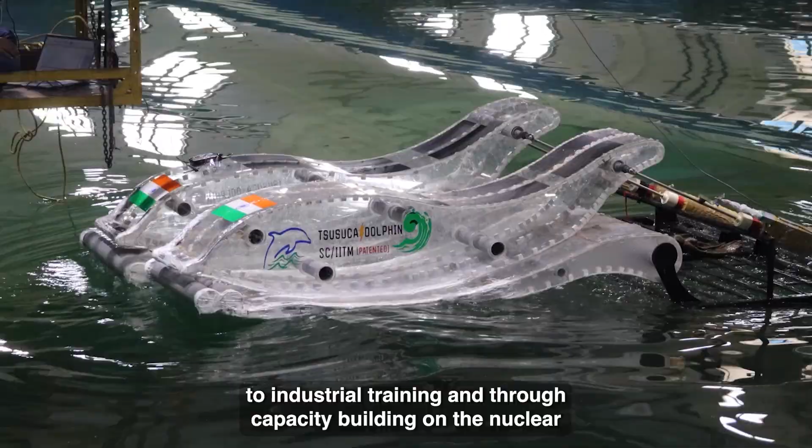This Maritime Engineering program is a very special, multidisciplinary program with input from mechanical, civil, structural, aerospace, naval architecture, chemical engineering, electrical, electronics, and applied mechanics. It is completely dedicated to industrial training and thorough capacity building in the new trade of the maritime sector. It's a booming economy offering many job opportunities and research frontiers as India grows. The Blue Corridor initiative planned by the Government of India is one important mission requiring maritime engineering growth, and this program caters to the expected capacity building for it.

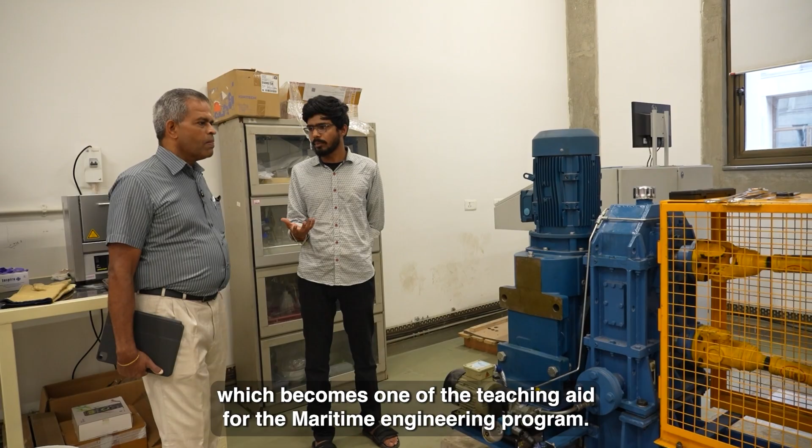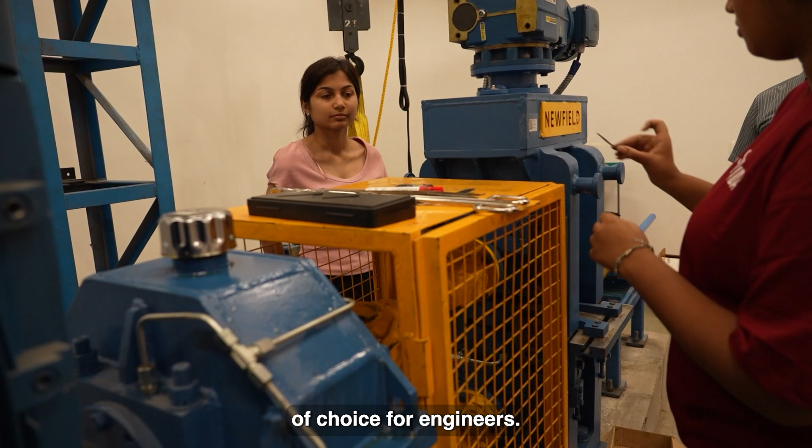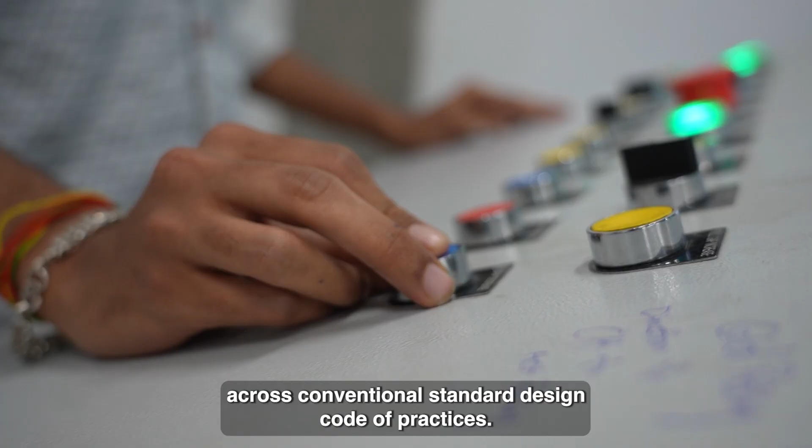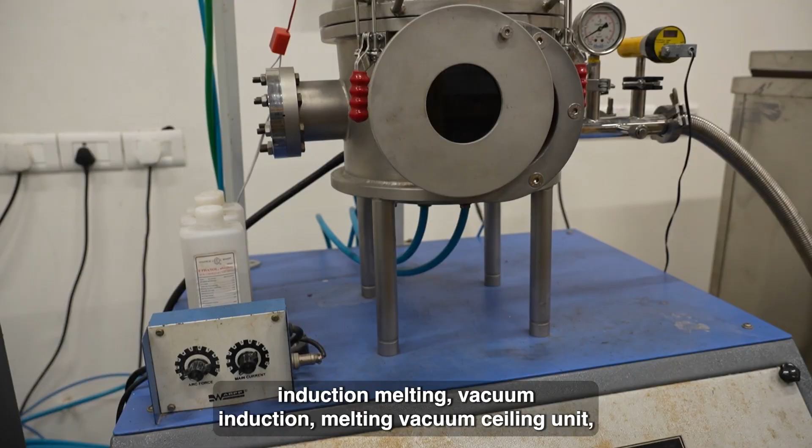This is part of the material science engineering laboratory, one of the teaching aids for the maritime engineering program. When we talk about materials innovation in the maritime industry, concrete and steel have been conventional choices for engineers, but we now have titanium vessels and high-speed craft boats made of fiberglass. These are advanced materials that don't fit conventional standard design codes of practice. We conduct box furnace tests, tube furnace tests, vacuum arc melting, induction melting, vacuum induction melting, and vacuum sealing in this laboratory, which is a small segment of the material science laboratory.

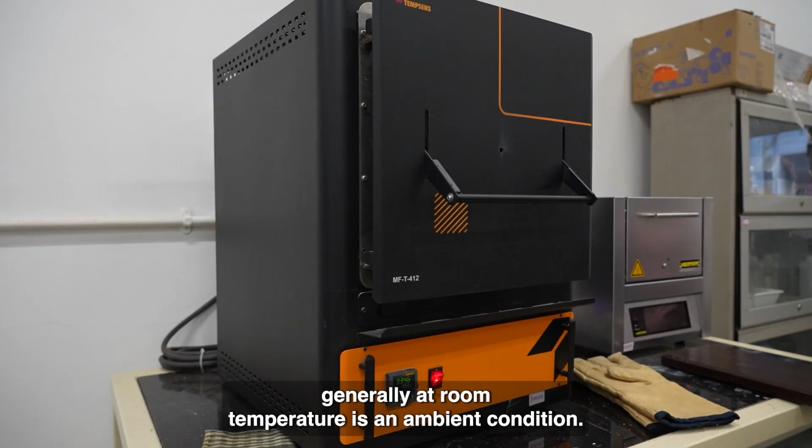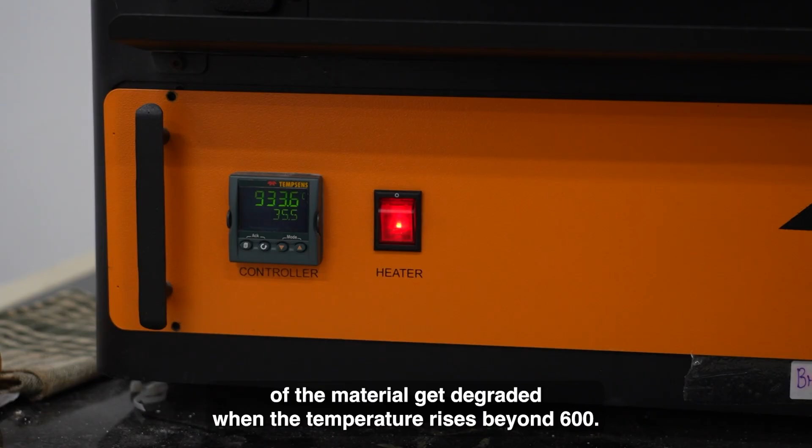A typical furnace here can test specimens at operating temperatures as high as 1200 degrees Celsius. Generally at room temperature and ambient conditions, mechanical properties don't change much, but as you'll see in the course lectures, the strength of materials degrades when temperature rises beyond 600 degrees. Therefore, for fire resistant design, you must choose an alloying element such that the strength doesn't degrade beyond 600 degrees Celsius.

Welcome to the ambience of the IIT Madras lecture theatre, one of the interesting classrooms where maritime engineering classes will be conducted. We have state-of-the-art projection facilities and good audio-visual recording systems. Once the lecture is over, the system here can generate PDF files of the lecture directly and email them to your email ID. It's a state-of-the-art facility where lectures are recorded for lifetime and shared with students immediately. This is the IIT Madras library.

The library has collections of all books referred to as standard textbooks and references for the course and program. It also has many online editions of design codes of practice, reference materials, and e-collections of various video lectures from international courses and programs related to maritime engineering.

We will be taking you around to the advanced material manufacturing units, so you will have state-of-the-art facilities available at IIT Madras. Welcome to the program to join MTech and PhD at IIT Madras Maritime Engineering. Please try to enjoy and take advantage of this to the maximum. Welcome to the program and welcome to IIT Madras.

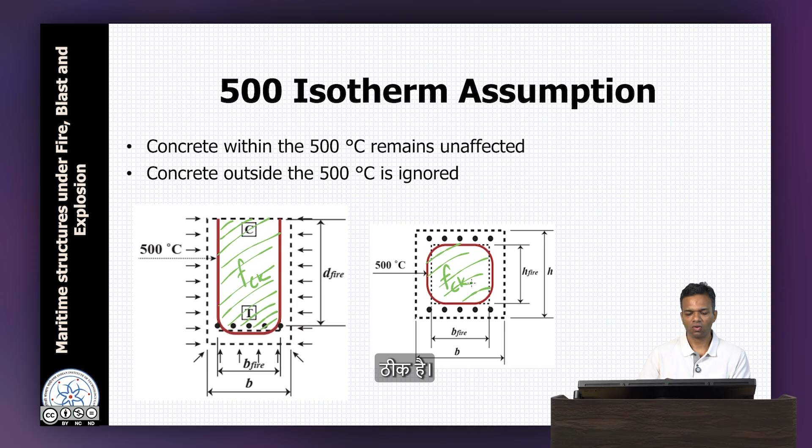Just to quickly review, the 500 isotherm assumption simply states that concrete within the 500 degree isotherm remains unaffected, meaning it has full strength. If this red line shows the 500 isotherm, the concrete inside has full strength FCK - this is the case for a beam, and this case for a column with all four sides exposed. Concrete outside of this has zero strength, so we need not consider it. For the rebars, we compute the temperature and consider the strength reduction factor appropriately, taking that into design calculations. This is the basis of the 500 isotherm method.

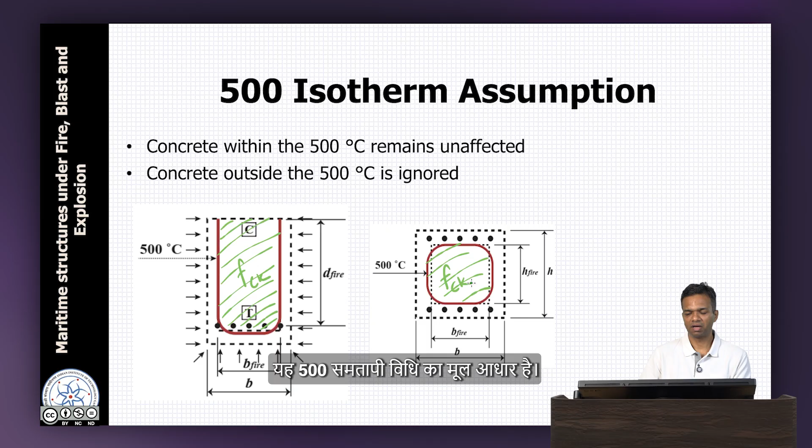We also saw that slabs are generally exposed on one side, while beams have 3-sided exposure, and columns have 3-sided or 4-sided exposure, though columns can also be 3-side, one-side, or 2-side exposed depending on the condition. Now for slabs, the 500 isotherm will be a straight line parallel to its surface.

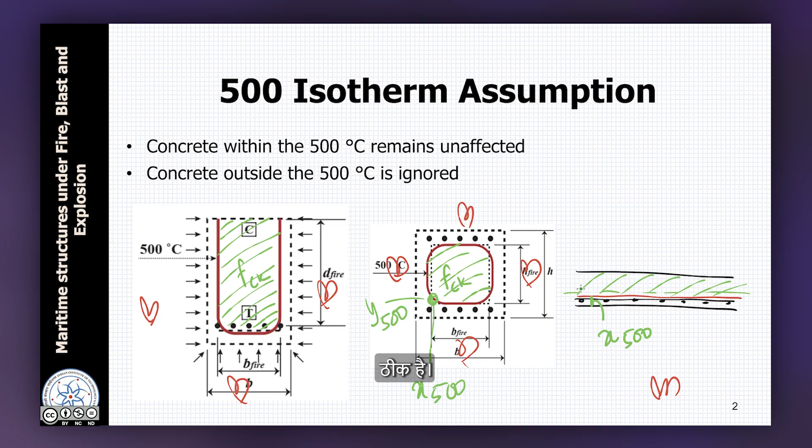This is what x500 will be if you are using x coordinate in that direction, where we were defining x500 and y500. We already defined these things and saw how to calculate this. In case of slab, much of the concrete under compression will remain functioning because the neutral axis lies somewhere here, and concrete below the neutral axis in the tension zone is anyway not considered for design. So this is the basic overview of the 500 isotherm method.

Now the next kind of structural member in RCC will be slabs. So we look at design of slabs. It is customary to consider design of slabs as similar to design of beams, except that for B we give B equal to 1. However, one major difference happens in the thermal analysis.

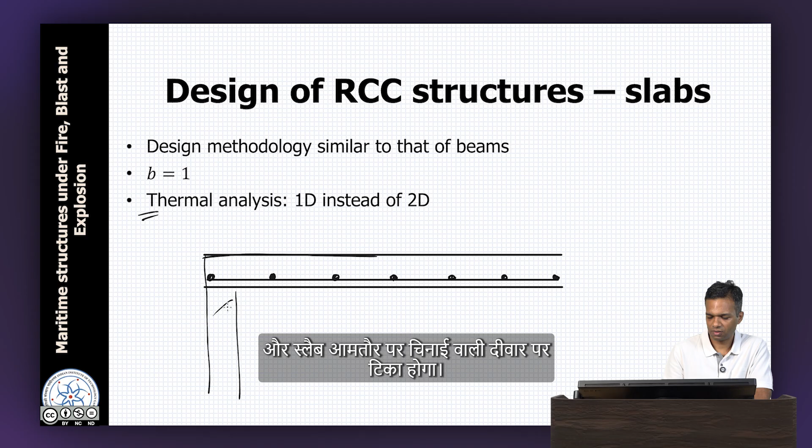So let us say we have this slab, which has a reinforcement going there, like this, and the slab will generally be supported on maybe a masonry wall, or it may be supported on a column. The fire scenario will be such that if there is a room at the bottom where the slab is covering it, the fire happens inside the room. So only the bottom surface receives this heat, and hence this is a 1D heat transfer problem instead of 2D.

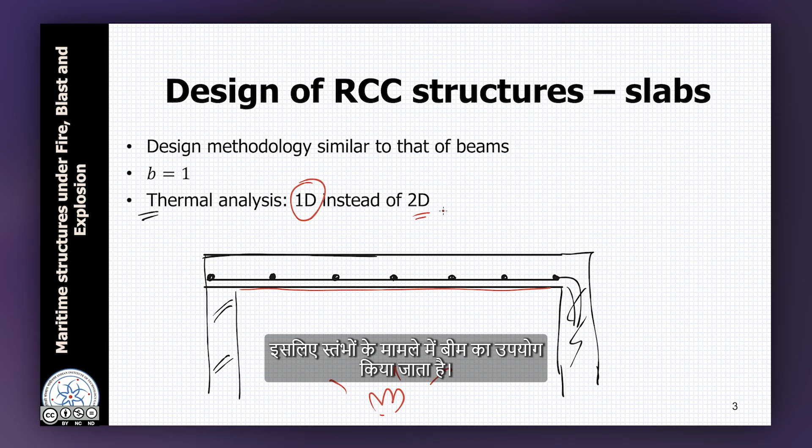In case of columns or beams, we can have one-sided exposure, two-sided exposure, three-sided exposure, or four-sided exposure. These are the possibilities. Whereas in case of a slab, we generally have only one-sided exposure. Because the exposure is one-sided, we can do thermal analysis also in one dimension instead of in two dimensions, right?

And we have seen this when we were doing the Wickstrom method. We just oriented this in a vertical manner, which means for the purpose of orientation, we said it is like this, where this is the x axis, exposure is on this side, and then temperature distribution on this x axis will be like this for an insulating material, where Ts is the surface temperature which links with the fire temperature through convection and radiation. And then if you recall, we also defined this delta, the penetration depth. So we can talk about delta500, which is the depth at which temperature is 500. So thermal analysis can be done in one dimension, which is a great simplification.

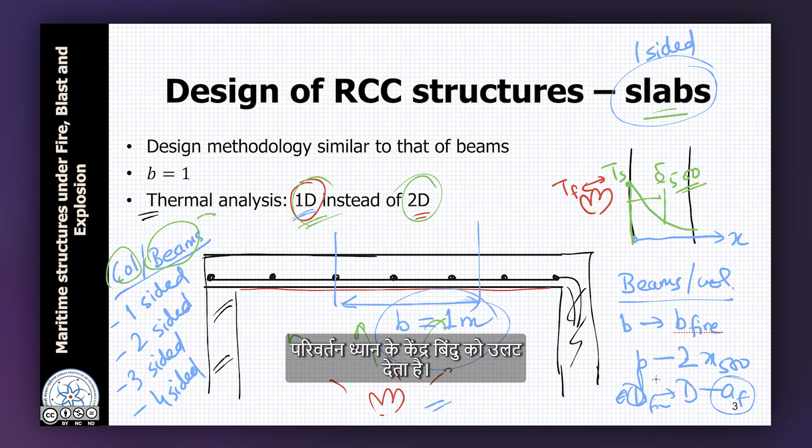So for beams or columns, this B became B fire, which was B minus 2 times x500. This capital D became small d fire, where it was capital D minus A fire. A fire was the location of the centroid as temperature changes, centroid of the tension rebars. However, in this case, since it is one-sided exposure, there is no reason why temperature here and here will increase independently of here. So the B remains the same. So there is no B fire as far as slabs are concerned.

Okay, so now let us look at this example. There is a simply supported slab of this span, thickness 200 mm, so this is capital D. M30 grade concrete, FCK is M30, 16 mm diameter, Fe415 bars, the spacing is given, clear cover is 15 millimeters, and the bending moment demand per meter is 70 kilonewton meter. So now we have to determine its fire rating or fire resistance subjected to a standard fire from the bottom.

Okay, so let's now begin to consider this directly in the code. In the given data, we have B and D. So B we have taken as 1 meter, and capital D is 200 millimeter.

FCK M30, so 30 megapascals, 415 steel, and this is the spacing. The spacing in this case will be required to calculate area of steel. In case of beams, we get area of steel simply by saying area of one bar multiplied by all the bars which are there.

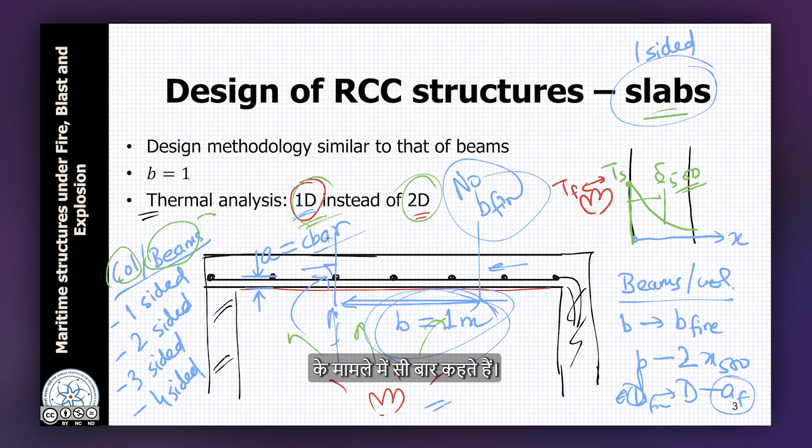This is the diameter of the bar, 16 millimeters. This is the clear cover, which is also given. So C bar, this is like A, the centroid of the rebars, which we are calling C bar in case of slabs. C bar is clear cover plus diameter of the bar by 2, the centroid of the bar from the bottom.

AS, which is area of steel, is width, which is 1 meter, divided by spacing, multiplied by area of the bar. This is the total area of steel AS. Then M demand is the total moment demand.

Since we will be doing a one-dimensional heat transfer problem, we are doing thermal analysis of the 1 meter strip. Bottom surface is at x equal to 0. If we have a slab located like this, the coordinate axis is oriented this way. So this is x, and this point, bottommost point, is x equal to 0.

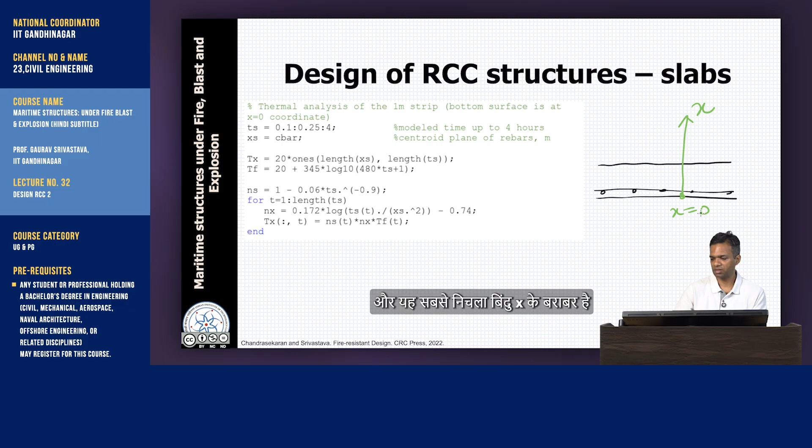The centroid plane of the bars is at C bar, which is this. Tf is fire temperature, standard ISO 834. Then we use Wickstrom method, so Ns, Nx, and we calculate Tx, which is temperature of each such point as a function of time. Tx is a matrix where each column represents one time step and each row represents one coordinate in x.

Once we have done the thermal calculations, we move on to structural calculations. For Tx, which is for the centroid location, we get the strength reduction factor for the rebars. Now force taken by the rebar, which is force in tension, is Ksy, which is this factor, multiplied by Fsd, cold strength, multiplied by As. Then force taken by concrete.

Lambda is 0.8, eta is 1 because Fck is less than 50. So again using the same rectangular stress block, we are calculating depth of neutral axis. Once we have depth of neutral axis, we are calculating moment capacity, like this.

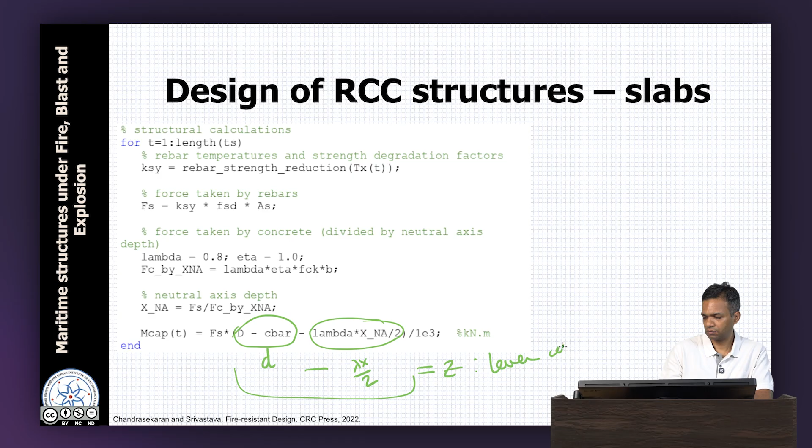Let us look at one more example. So again, a simply supported slab, 4-meter span. Span is lesser, depth is same, 200 millimeters, M25 grade concrete, 18 mm diameter, 415 bars, spacing is 125 mm, and clear cover is also same.

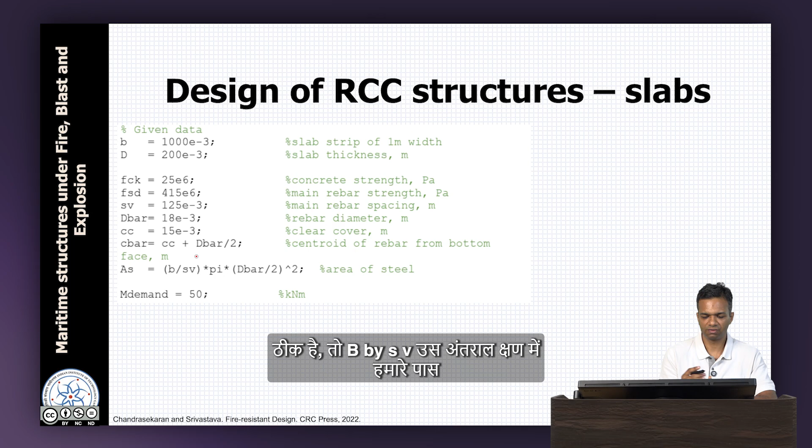We go right into the code. We have geometrical parameters B and D, FCK, Fy, spacing, diameter of the bar, clear cover. This C bar is like the small a earlier, which is clear cover plus diameter of the bar divided by 2. Area of steel will be B by SV times area of 1 bar, so B by SV is how many bars we have in that spacing. Moment demand is 50 kilonewton meter.

Then we go on to thermal analysis. For thermal analysis, we are calculating it up to 4 hours. XS is the coordinate of the centroid plane of the rebars, X coordinate. TF is temperature of the fire, again ISO standard 834 curve. And this is the for loop for temperature calculation using Wickstrom's method.

We've been using the same method throughout for RCC. So we have now these structural temperatures, right? So this Tx has been calculated.

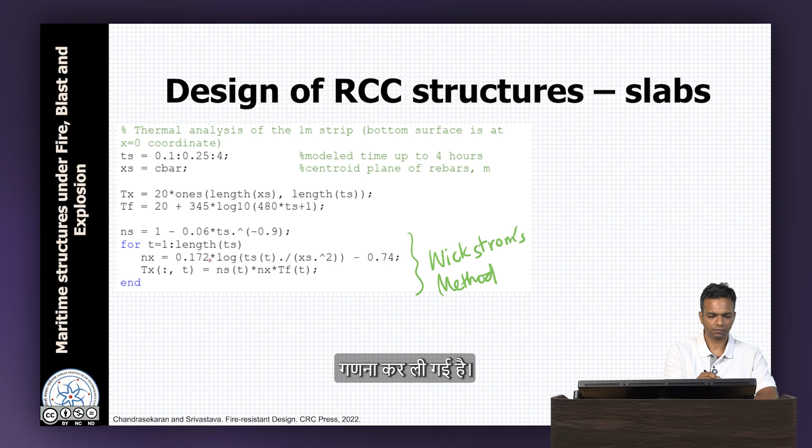We have Tx. Now we can take the rebar temperatures out. After we have taken the rebar temperatures, we calculate the strength reduction factor for rebars. Then we calculate forces taken by the rebars.

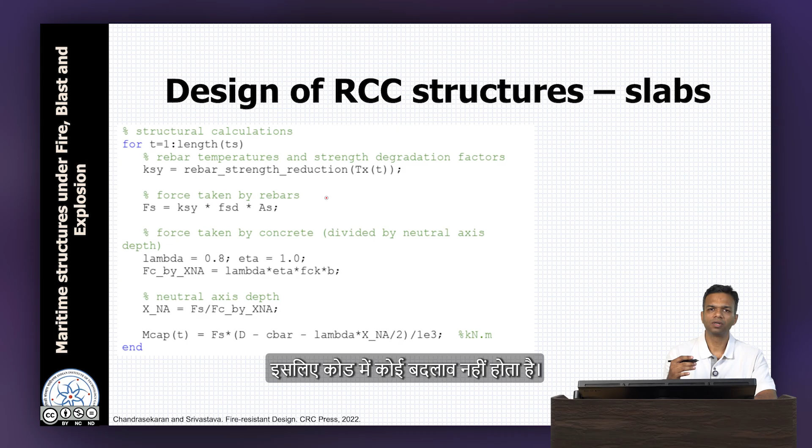Similar type of calculations, so the code does not change. Only thing that changes is the initial inputs of the geometry, of the rebar, strength, and other things.

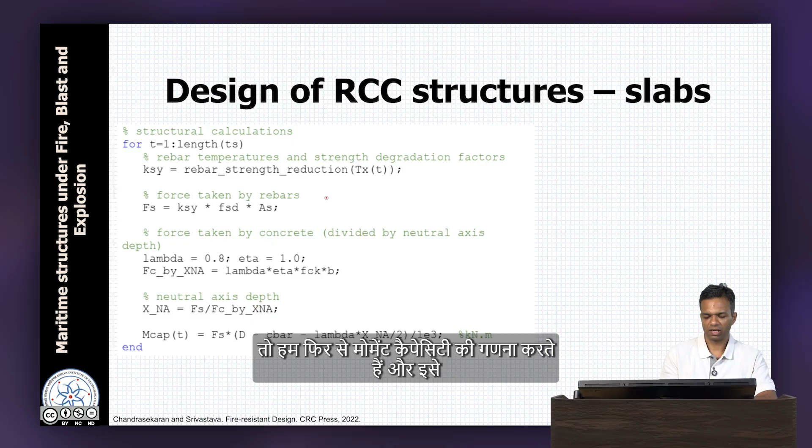So again we calculate moment capacity and we can plot it with respect to temperature or time. Temperature and time are correlated through the ISO 834 curve, and the fire rating we get here is a little over 1.5 hours.

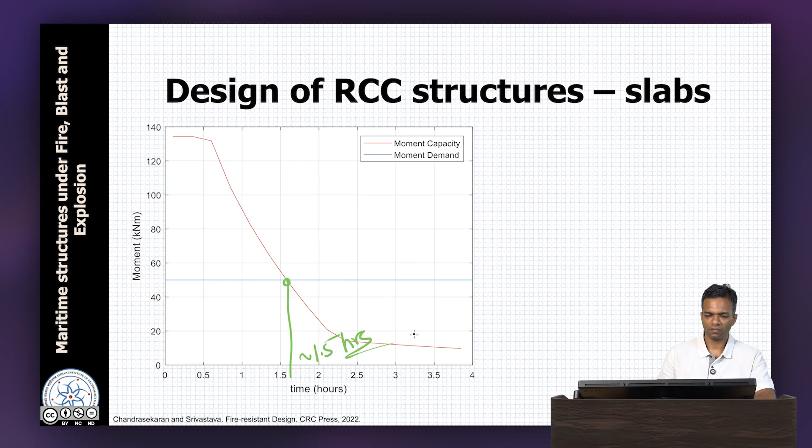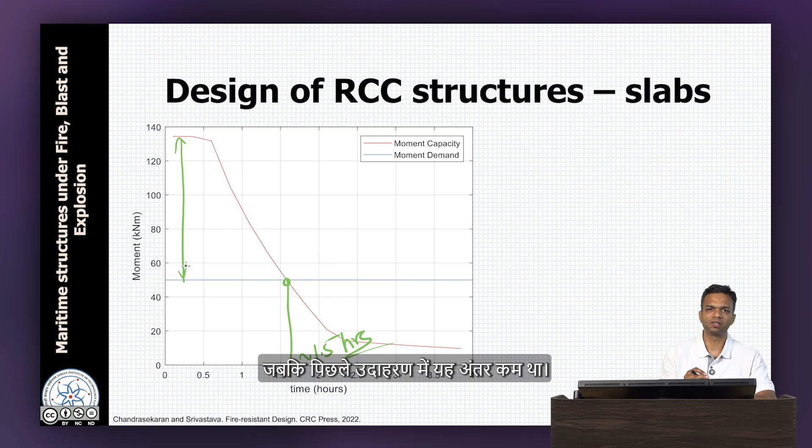One thing we will notice here is in the cold condition there is a larger difference between the demand and the capacity, whereas in the previous example this difference was small.

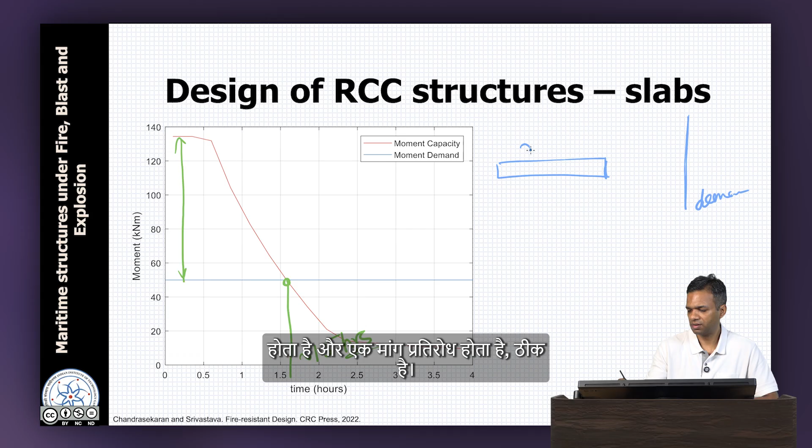This is one of the things which is very common, and it is obvious also that if you have more spare capacity - you may recall in one of the lectures we were saying that there is a design effect and there is a demand resistance - during fire what happens is that this margin of safety reduces.

That is what we were saying. So if initially we have a greater margin of safety, it will take longer for this thing to fail, and that is what is visible here, that we have a greater margin of safety here, and the fire rating is greater.

This is quite common, and several codes understand and accommodate the fact that if the loading ratio - so this is defined as the loading ratio in steel, IS 800 also does that - the loading ratio was defined as

the demand divided by the capacity. So if the loading ratio is small, the fire resistance rating is expected to be large.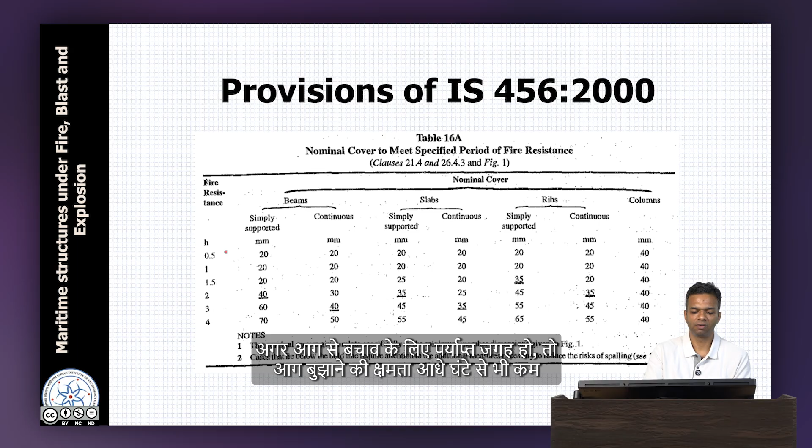or it is also possible to conclude that if 20 mm cover is required for a half hour, 30-minute fire rating, then for a 15 mm cover the fire rating will be less than half an hour. But we know now that this is a conclusion which is incorrect.

So the clear cover is 15 mm. This is the first beam where we had the fire rating of 1 hour, whereas obviously from here you cannot conclude that.

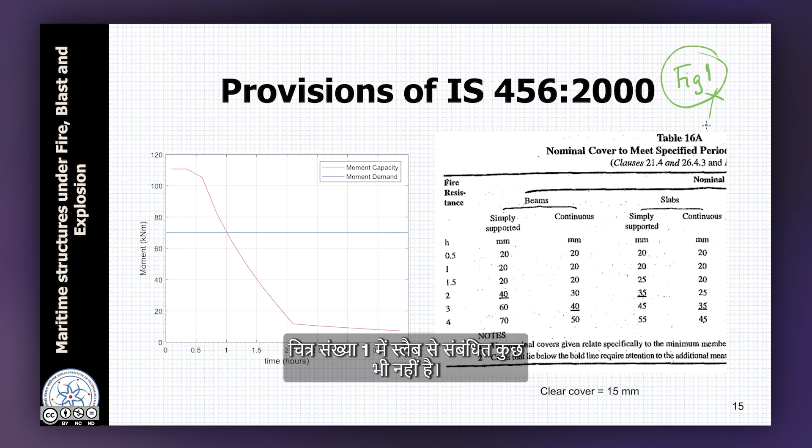Now here we are referencing only table 16A. We are not referencing figure 1 of IS 456 because figure 1 does not have anything related to slabs. So this is the first example.

Second example also, clear cover was 15 but fire rating was higher. So simply the effect of this loading ratio cannot be taken in tables of this kind, and this is where detailed calculations are necessary for us to be able to actually calculate the requirements.

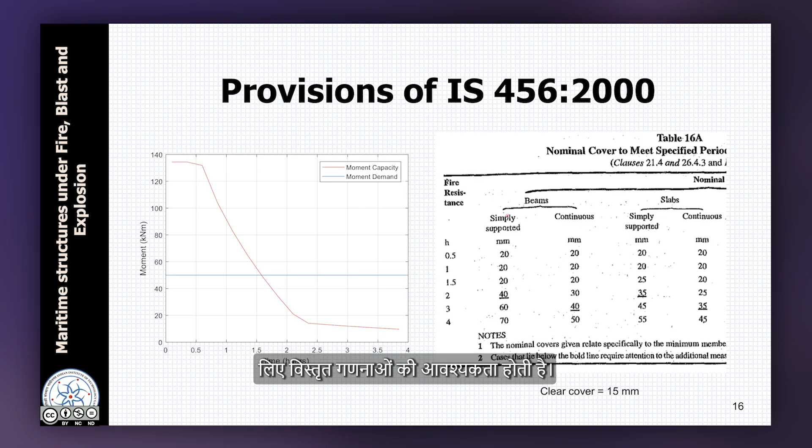Now let us move on to study design of columns, RCC columns.

Now this particular thing shows again the 500 isotherm. We will use the same method. This fully closed 500 isotherm is a case when a four-sided exposure has happened, but we know that if there are other sides of exposure, then this 500 isotherm will be accordingly adjusted.

Right. So we know that if the column is taking axial load, there are two parts: one is the compression taken by concrete, one is the compression taken by steel.

So for concrete we will have the area of concrete which is B fire times D fire, or in this case H fire as in the diagram. So that is the effective area - this is the area of concrete that is effective at any temperature, which is inside the 500 isotherm, times FCK, which is the strength of concrete in compression.

And then there will be NS fire, which is the load taken by rebars. So for rebars, we will take each rebar and factor in the strength reduction factor, and the total will be a combination.

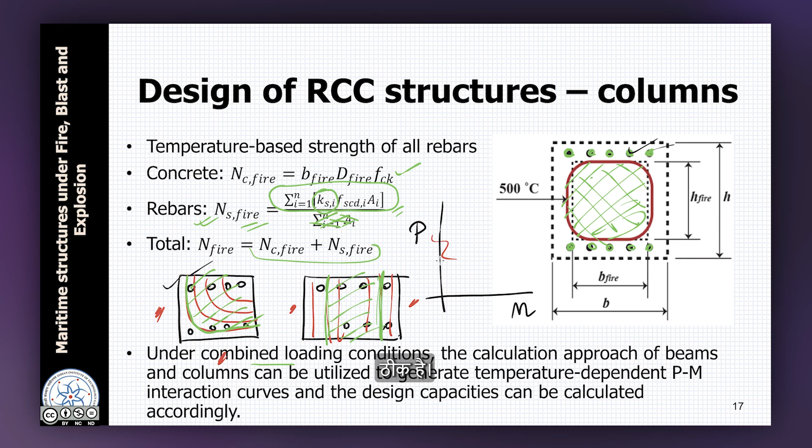So this is the case when we have pure compression. However, there can be combined loading conditions where there will be a moment as well as a load. In such a case, we will have to do section analysis in line with these assumptions of 500 isotherm, and we will have to develop this PM interaction. What one can expect is that if this is the PM interaction in cold conditions, under fire conditions this interaction diagram will shrink. So as temperature increases, the diagram shrinks. However, the calculation approach will be the same - there is no change.

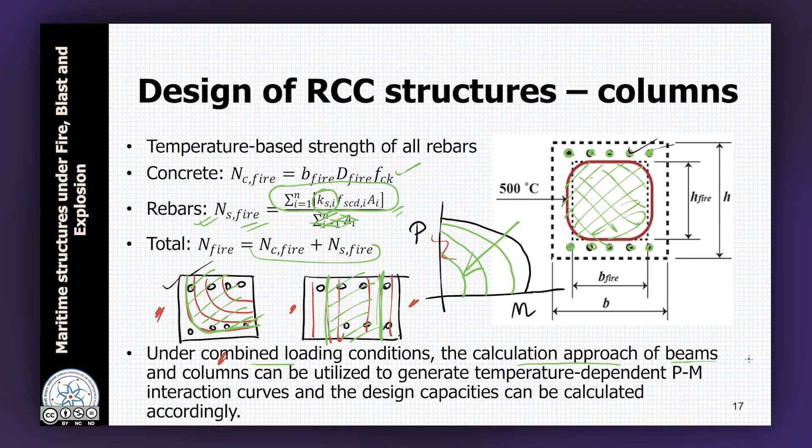Let us look at an example. So we have a short reinforced concrete column of dimensions 500 by 400. Grade of concrete used is M50. Fe 500 grade steel is used. Diameter is 20 mm for all the bars, and load demand is 8000 kilonewton.

So this is what we are showing here. I think there is one change in the text here - these intermediate bars, internal bars, these are 20 mm, but the external bars are 25 mm. That is a difference.

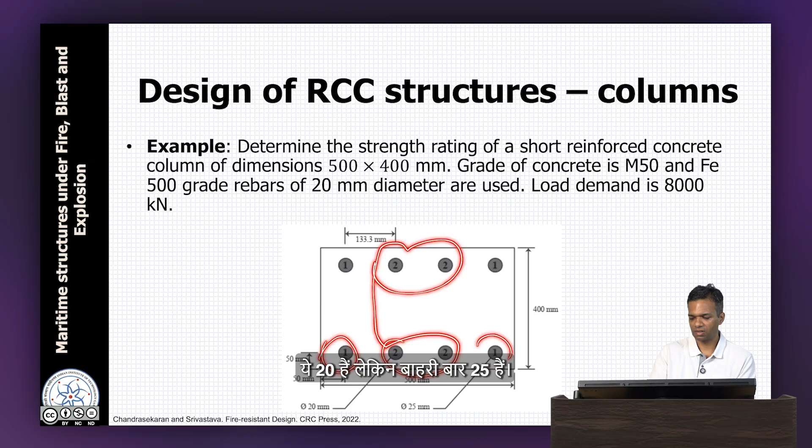Now we follow the coding approach that we have been doing. Initially we have B and D - here we are calling B as 500 and D as 400. FCK is 50 MPa. We are using Fe 500 steel, so FSD is that, for both. The demand load is 8000 kilonewtons. So just like we did for beams, we do a rebar data structure for all the rebars.

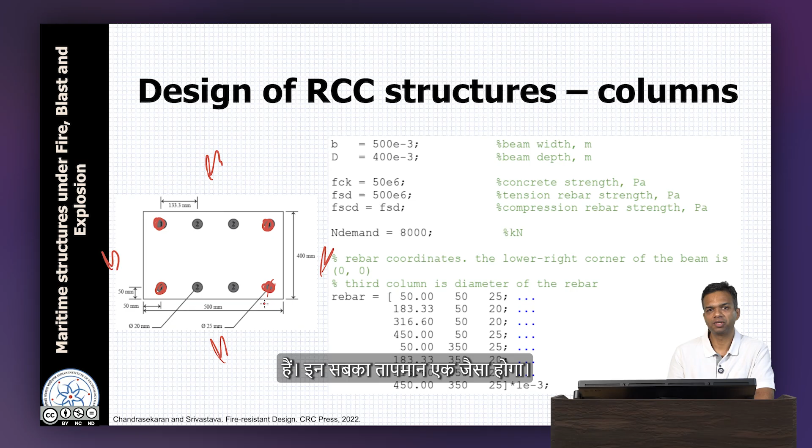Now here this is a four-sided exposure, so we have fire on all four sides. So from a temperature contour point, they will be circular in nature. So we will see that these four bars will have the same temperature, and hence they are labeled all of them as 1, whereas these also will have same temperature and they are labeled as 2. So this first row corresponds to the first rebar here.

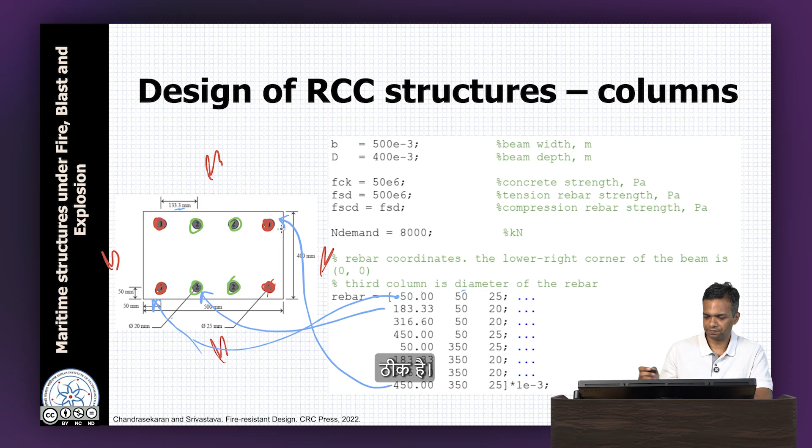So the x and y coordinate is 50-50, diameter is 25. Then this is second, where x coordinate is 183 - that is 133 plus 50, y coordinate remains 50, diameter is 20, so these two bars are of 20 mm. So like this, and similarly this last one is here. So this is how we have defined the rebar coordinates and their diameter.

Now for thermal analysis, we will have to again go back to two-dimensional analysis. For slabs we were able to use one-dimensional analysis. So we are doing modeling up to 4 hours. X and Y coordinates are like this. Now here, since it is a 4-hour exposure

on all 4 sides, we can see that the axis of symmetry lies on both sides, which means we can take only 1/4 and we model only this because we have axis of symmetry. So this axis of symmetry is happening, 2 axes of symmetry, because we have 4-sided exposure, and also the geometry and the rebars are equally distributed about these 2 axes. So for x's and y's, we are only modeling up to b by 2 and d by 2.

Then this ND grid is same as that we were doing earlier, enabling us to calculate contour of temperatures in 2D. TF, same as earlier, fire temperature corresponding to ISO 834 curve. Now this loop calculates temperature. The third index T denotes time, which means we are storing one matrix for each time, and each matrix corresponds to the XY coordinate temperature within this symmetry section. Now using this one can plot, so we will get the temperature contours.

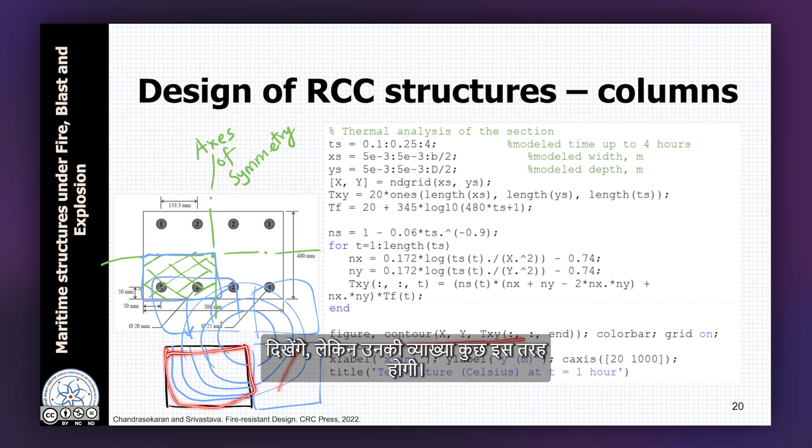Once temperature calculations are done, we move on to structural calculations. First we find out X500 and Y500. In one of the lectures we saw the function locate X500 and how it works. This XX500 comes out of the contour function, which is a 2 by n array, where after the first column, each column gives us the X and Y coordinate of every point located on the 500 isotherm.

Then we calculate B fire and D fire. In this case we require both because the overall cross section is reducing. So B fire is B minus 2 times X500, and D fire is D minus 2 times Y500.

This is B fire, which is B minus 2 times X500, and this is D fire, which is capital D minus 2 times Y500, where Y500 is this distance, and X500 is this distance.

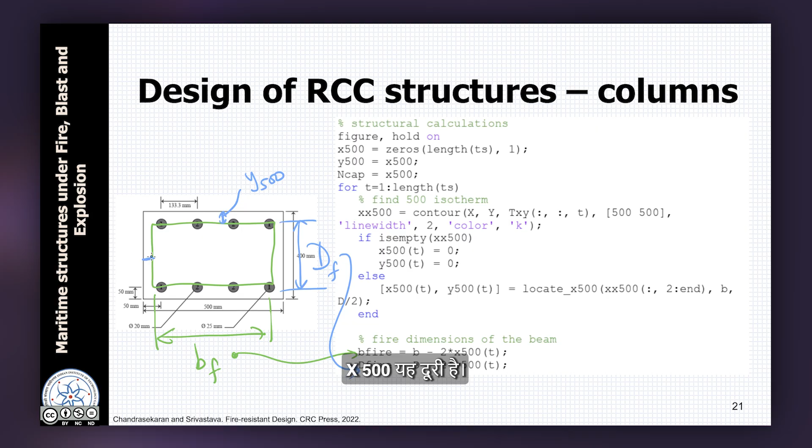So now that we have completed the thermal calculations and found the location of X500 and Y500, we have calculated B fire and D fire. Now we can move on to structural calculations.

Before we can do structural calculations, we also require rebar temperatures. This we obtain in a manner similar to what we did for beams. So for rebar, each column of this data structure: the first two columns give us the x and y coordinates, the third column gives us the diameter. So we calculate x, y.

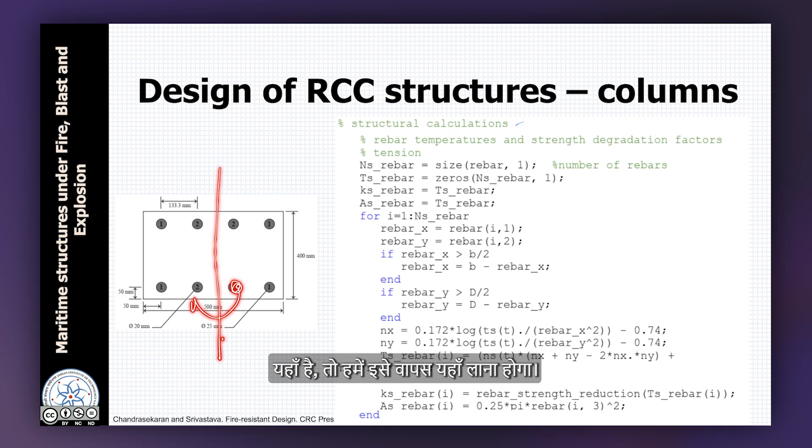Now if the x coordinate is more than b by 2, which means if the x coordinate is here, we have to bring it back to here. This is because we have modeled symmetry about this axis. So if it is more than b by 2, we say it is b minus rebar x, so this bar and this bar will have the same temperature.

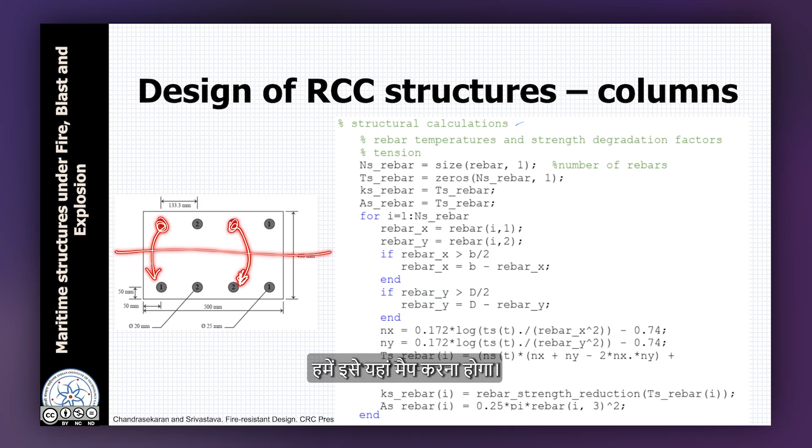In this case, because it is a four-sided exposure, we have also used symmetry about this line. So if the y coordinate is greater than d by 2, which means if the y coordinate is here, we need to map it to this particular point. If the y coordinate is here, we need to map it here. That is what is being done in these two lines.

So once we finish this, we have the x and y coordinates of the rebar. Then we calculate the temperature at that xy coordinate using Wickstrom's method. So this Ts rebar, this is Ti, the temperature of each rebar we get from here, and this is Ki, the reduction factor for each rebar. This last one is Ai, the area of each rebar.

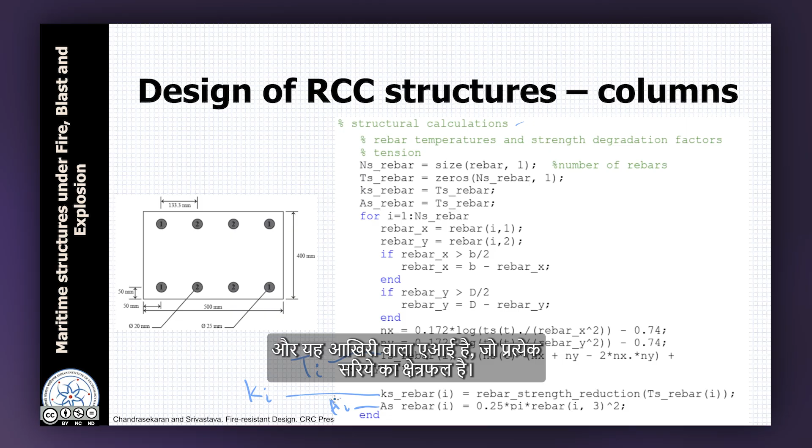We have calculated all of that, then we can move on with structural calculations. Here we are calculating first the average stress taken, the compressive stress taken by all the rebars, which is the summation of K times FSD times A, divided by summation of A. So this is FSD average, or in a fire condition, that is this.

Now we take this and multiply with the total area of steel, that gives us NS fire. In the previous slide where we saw this NS, we can also simply write this as the summation of the numerator here: KI FSD I AI. So this is also the total compressive force taken by all the rebars combined.

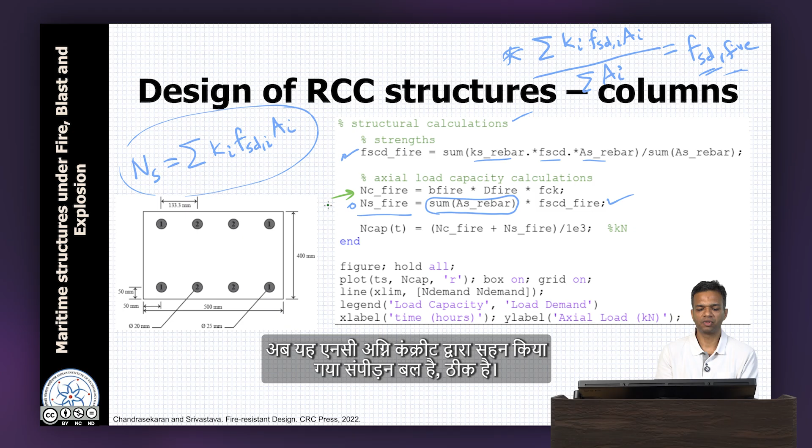Now this NC fire is the compression force taken by the concrete, that is simply B fire times D fire, which is the cross section area, multiplied by FCK. Now obviously for FCK there is no reduction, and the reason is that is what the 500 isotherm method assumes: within the 500 isotherm there is no reduction in concrete strength.

So we have these two, then we can calculate the total capacity, which is capacity due to concrete plus capacity due to steel, and we divide by 1000 to ensure the units are in kilonewtons, because our demand we have written in kilonewtons. So once we have all of this, we can plot.

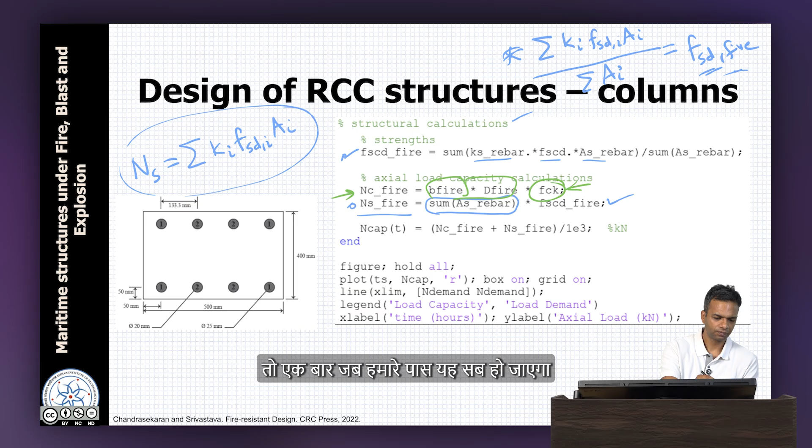Fire rating is when this capacity crosses the demand. So demand is being shown here. Demand was 8000 kilonewtons.

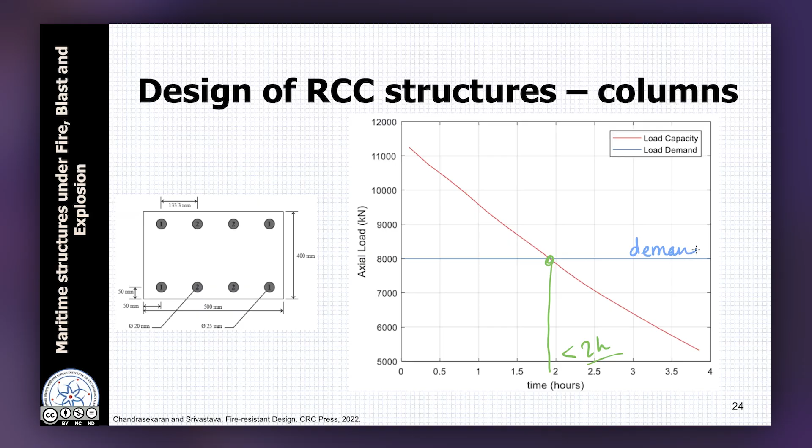Let us look at one more example. Now again, we are looking at a short reinforced column. Dimension is 450 by 450 mm. Grade of concrete is M40. Grade of steel is Fe500. Diameter of bar is 20 mm. Centroid is located 40 mm from the edges of the column. Load demand is 5000 kilonewtons.

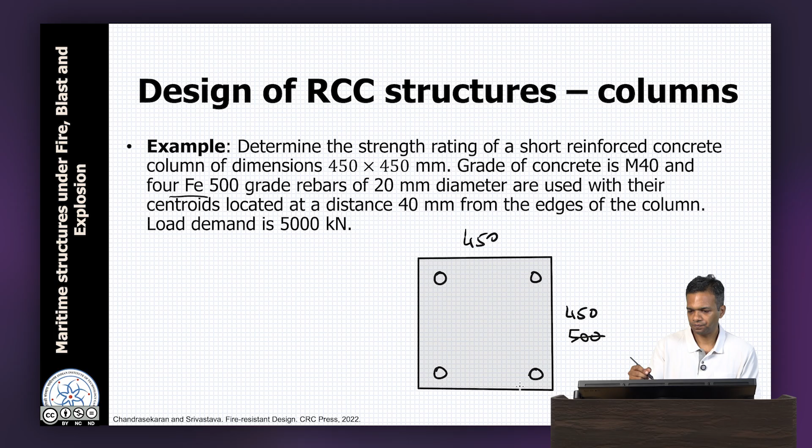So we can draw this. We have 450 by 450. It has 4 bars, which means they will be located one at each corner. Each bar is 20 mm. And the centroid distance is 40 mm, also 40 mm for all of them.

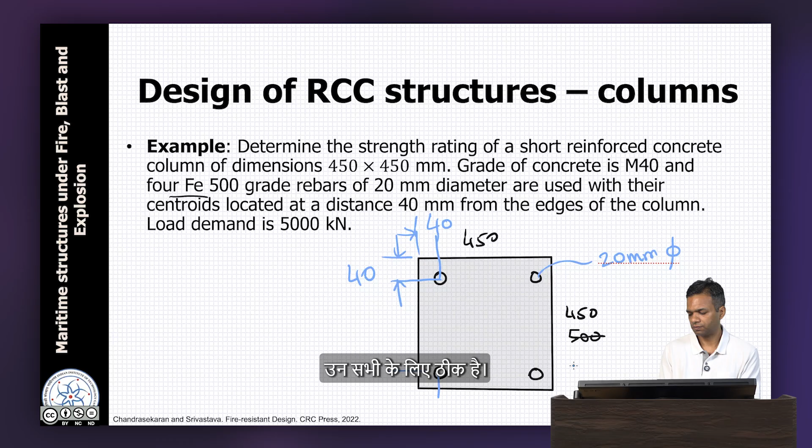So we can begin in the code. We'll say now B and D both are 450 millimeters. We are writing it in meters, so this 10 power minus 3 is there. Concrete strength is 40, steel strength is 500. Demand load is 5000, and then this is the rebar data structure where this is the x coordinate of all the rebars, y coordinate of all the rebars, and this is the diameter.

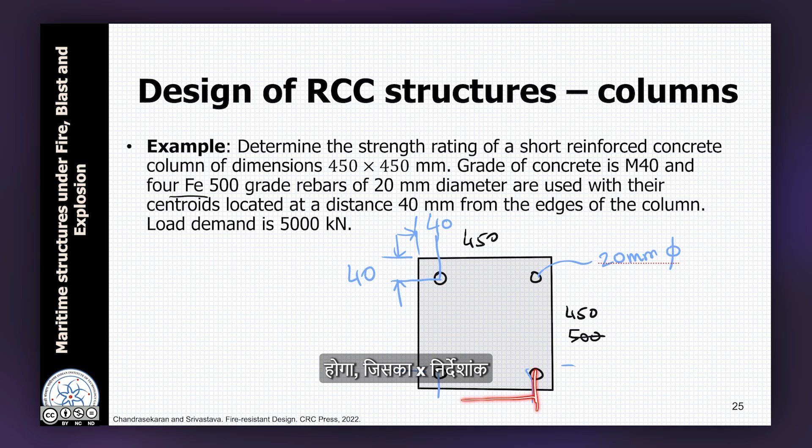So for the first bar, coordinate will be 40 and 40. For the second bar it will be 450 minus 40, so x coordinate will be 410, y coordinate will be 40. So that is what we have here: 40,40, then 410 and 40, then 40 and 410 for this bar, so x coordinate is 40 but y coordinate is 410, and then this is the top right bar where it is 410, 410, and 20. This is the rebar data structure.

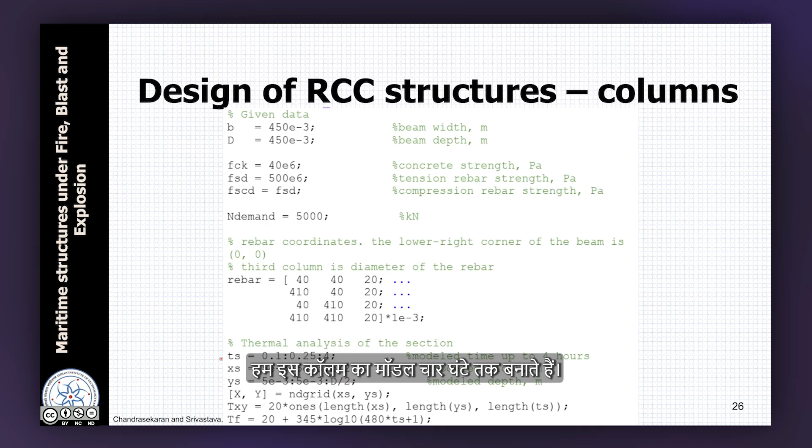Now we proceed with the thermal analysis of this column. We model up to 4 hours and we do a 2D analysis because this is a 4-side exposure. In thermal analysis, we are again using Wickstrom's method.

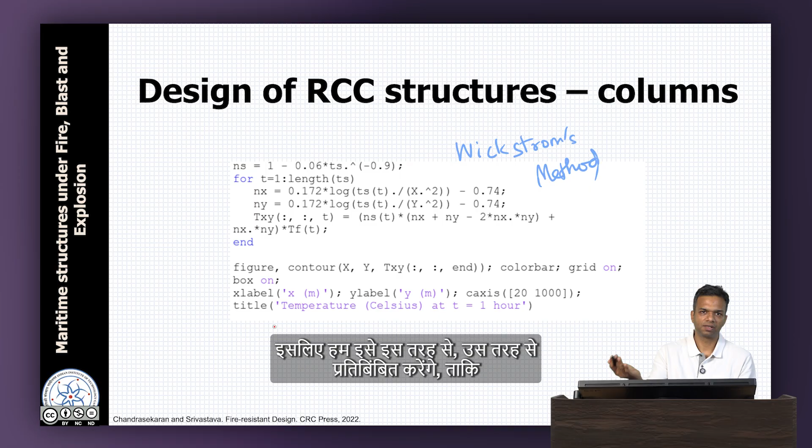We calculate Nx, Ny, Ns, temperature Txy. This is a data structure which directly can go into the contour function if you want to calculate the contours. Since we are again simulating only a quarter of the column, which is quarter symmetry, it will be like that. The contours will be like that, and the interpretation has to come from us that it is using a quarter symmetry. Hence we will reflect it this way and that way to get the overall closed contours that we are expecting.

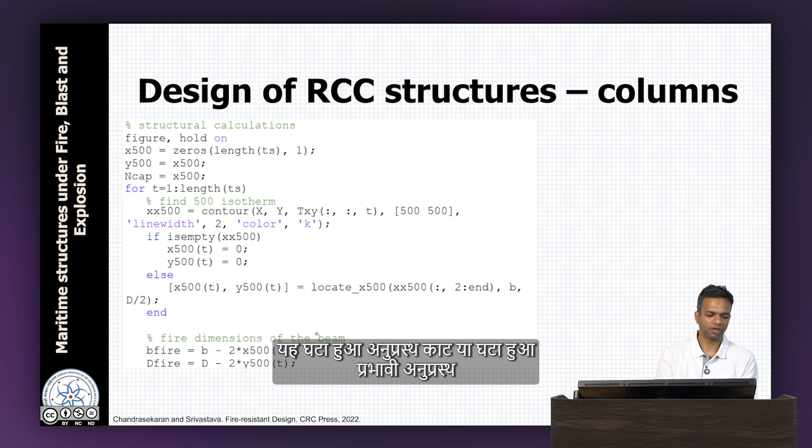Once we have the contours, we move on to structural calculations. So for structural calculations, again we first have to find the 500 isotherm. Once we have the 500 isotherm, then we calculate the x and y values. Then we calculate B fire and D fire. This is the reduced cross section, or reduced effective cross section, which is within the 500 isotherm.

Then we calculate rebar temperatures. For rebar temperatures, we have this x and y coordinate, which are the first 2 columns of the rebar data structure. Since we are using symmetries in x and y both, if it is more than b by 2, we reflect it back. If it is more than d by 2 on top, we reflect it back. So we get x and y coordinate of the rebars. From there, Nx and Ny is calculated. Then we get temperature of rebars, Ti. This is the reduction factor, Ki, and this is the area of each rebar, Ai.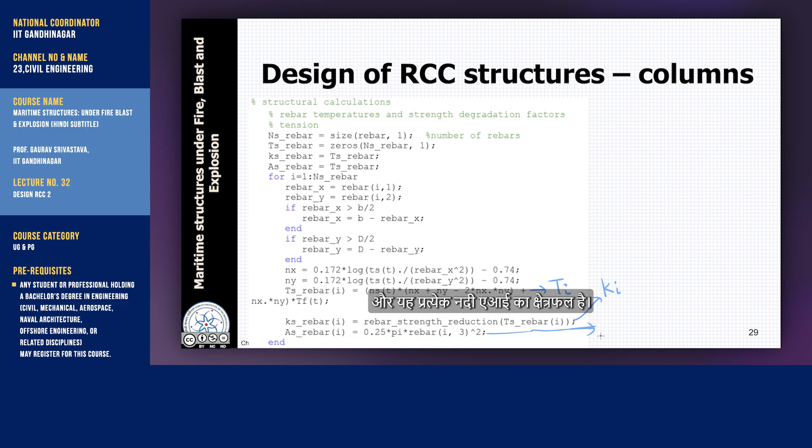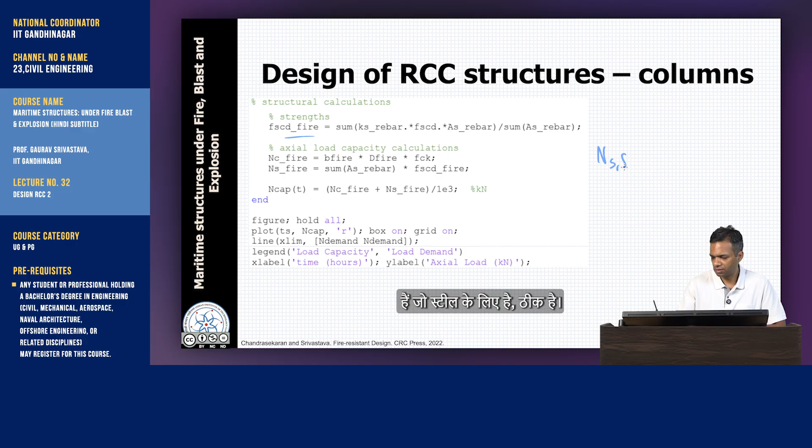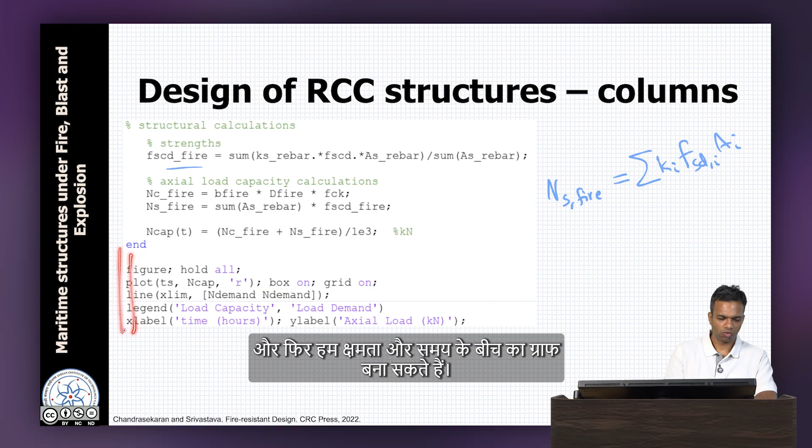So then again we can calculate Ns fire, which is for steel. That will simply be summation of Ki, FSDI, times Ai. So either this, or we can do it using the stress that is done here. And Nc is simply B fire times D fire times FCK. Now the total capacity will be concrete capacity plus steel capacity. We divide by 1000 to make sure units are in kilonewtons, and then we can plot the capacity versus time.

So this is the capacity versus time curve. In this case, we will see that this initial loading ratio is very small, which means the actual capacity is much higher compared to the demand. So the fire rating that comes out here is almost 3 hours, which is much larger compared to the previous example.

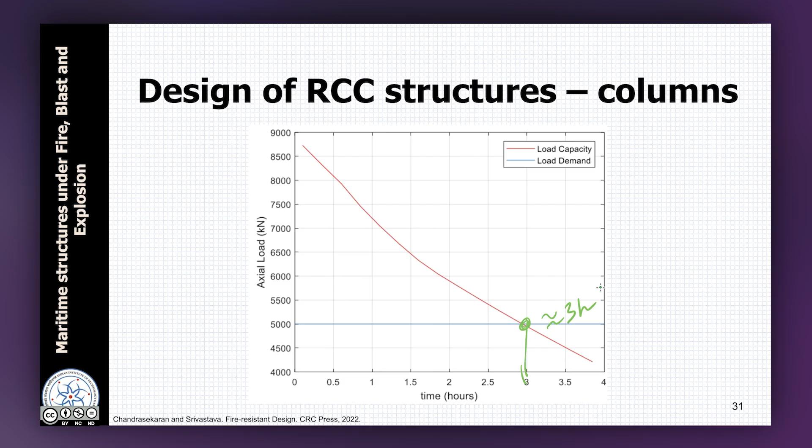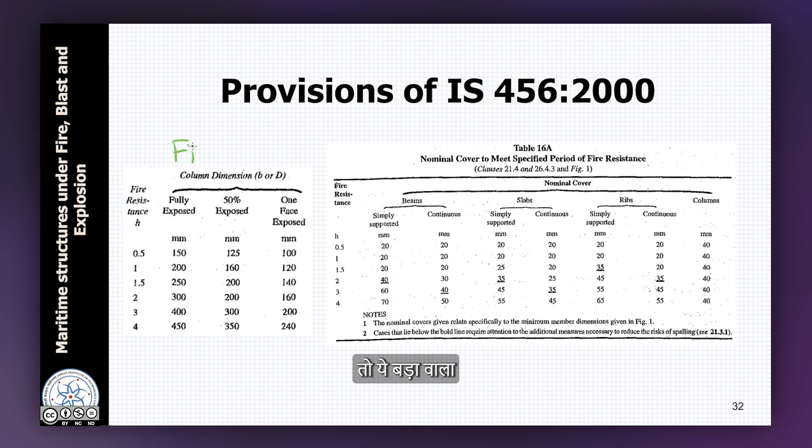So let's look at provisions of IS 456 again. This is figure 1, which we looked at from beam perspective also. This portion is relevant for columns.

On this axis we have the fire resistance in hours, and this gives the minimum dimension of the column required to achieve this fire rating. It considers three types of fire exposures: fully exposed, which is the two examples we have done, then 50% exposed—though whether it means adjacent sides or opposite sides is not clear—and then one face exposed.

So from figure 1, let's say if we require 1 hour fire rating under a fully exposed condition, the minimum dimension required is 200 millimeters. That is how we can read this.

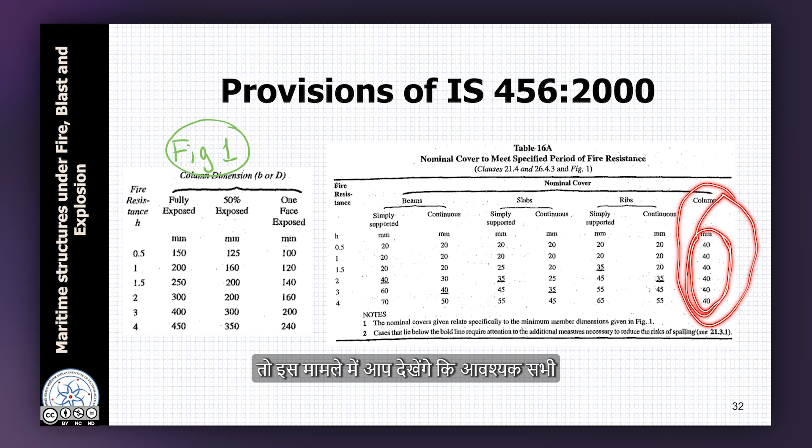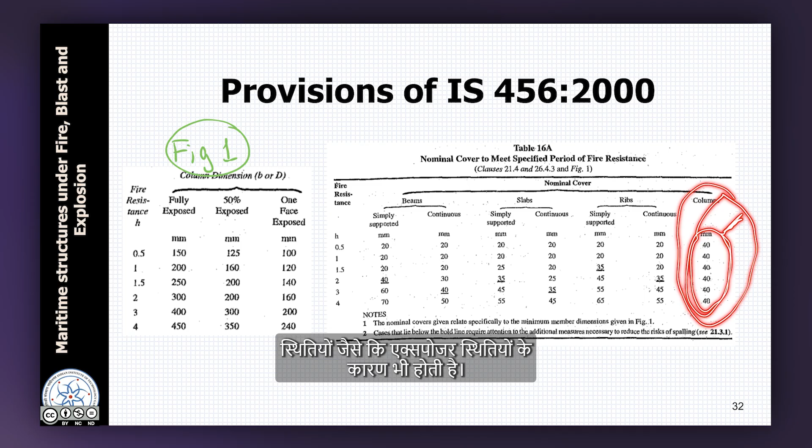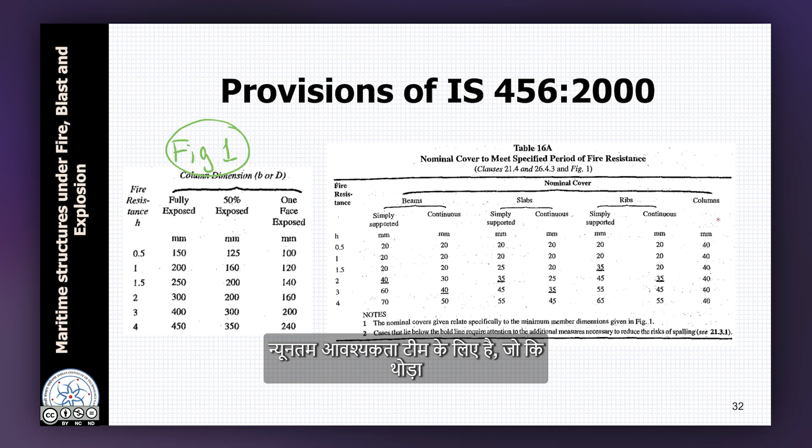Now table 16A has specifications for column clear cover also. You will notice that all the clear covers required are 40 mm. One of the things is that 40 mm sometimes is required from other conditions also, such as exposure conditions. But one way to interpret this table can also be that minimum required for 4 hours is 40 mm, and minimum required for half an hour is also 40 mm, which is a little bit not easy to follow.

So let us compare these two examples with the tables of IS 456. In one of the examples we had B equal to 400, D equal to 500, and cover was 37.5. The fire rating we found was a little bit less than 2 hours, maybe 1.9, 1.8 hours.

Now if we go with minimum dimension being 400 for fully exposed conditions, one can say that expected fire rating will be 3 hours, whereas it is much less. From this table, the clear cover of 37.5 is not available. But it doesn't mean that because even for half an hour you need 40 mm, 37.5 will have less than half an hour. That cannot be interpreted, right?

So it is better to do this type of calculations whenever these fire ratings are required.

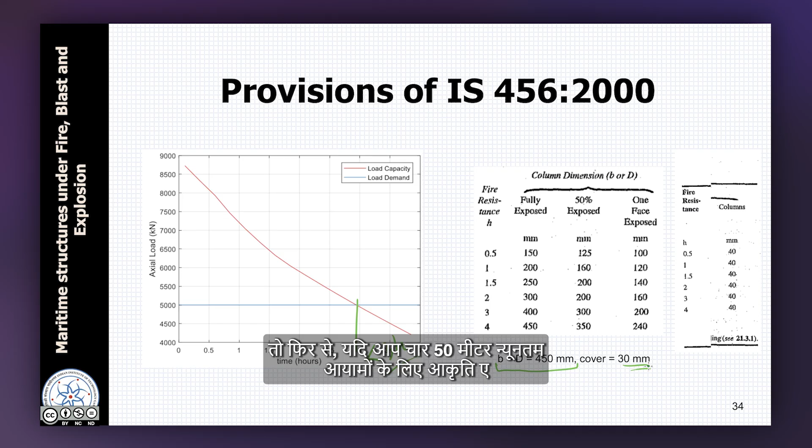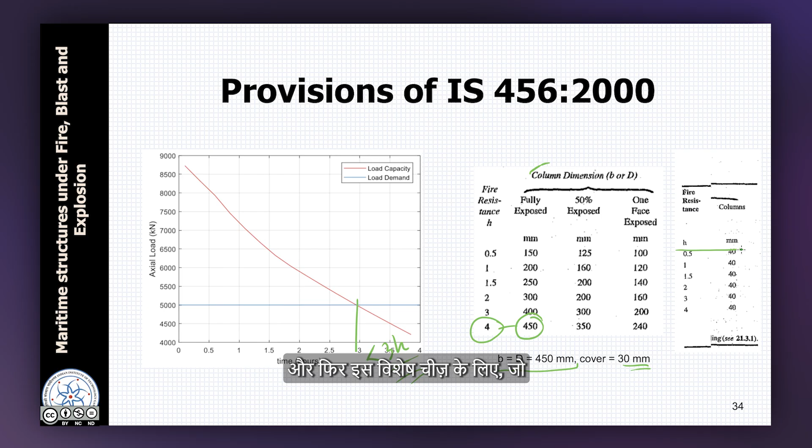Let's look at the other example where the fire rating was a little less than 3 hours, almost 3 hours. In this case B and D were same, 450, cover was 30 mm. Again, if we go to figure A, for 450 mm minimum dimension, one can say the expected fire rating is 4 hours, whereas it is less than 3 hours.

And for table 16A, less than 40 mm cover is not available, so one cannot really interpret.

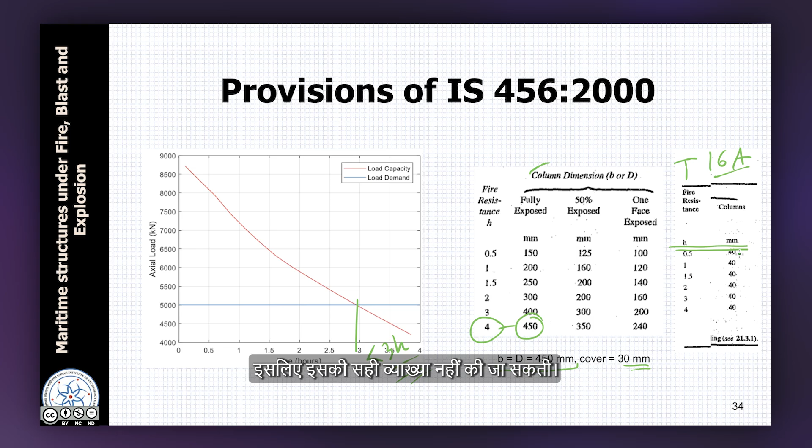So if we summarize what we have done in this lecture, we have looked at design of slabs and RCC columns using the 500 isotherm method. We looked at the thermal analysis assumptions and the structural analysis assumptions, and we saw how all of this can be used to calculate fire ratings using the 500 isotherm method.

Are there more accurate methods possible? Yes, they are possible, but obviously they become more complicated in analysis also. And for many practical problems, even codes include these methods, for example Euro codes. So these are practical methods of design which anyone can adopt.

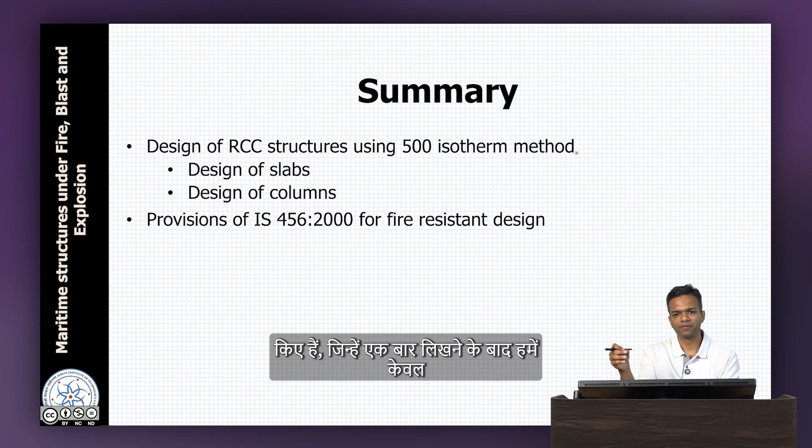For this method also, we have developed computer codes which, once written one time, all we have to do later is just change the initial parameters and find the design requirements, or in fact the capacity versus time curves. This capacity versus time curve is what we can eventually use to assess or estimate the fire rating.

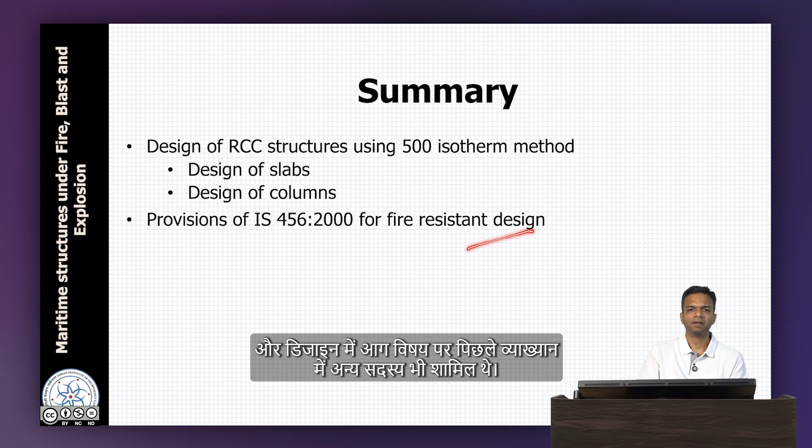We also looked at IS 456 provisions for slabs and columns in this lecture, and other members in the previous lecture, for fire resistant design. We saw that in most practical cases it is a little challenging to use these 456 provisions, primarily because either the data is not available in the table, or it does not take into account a large number of factors.

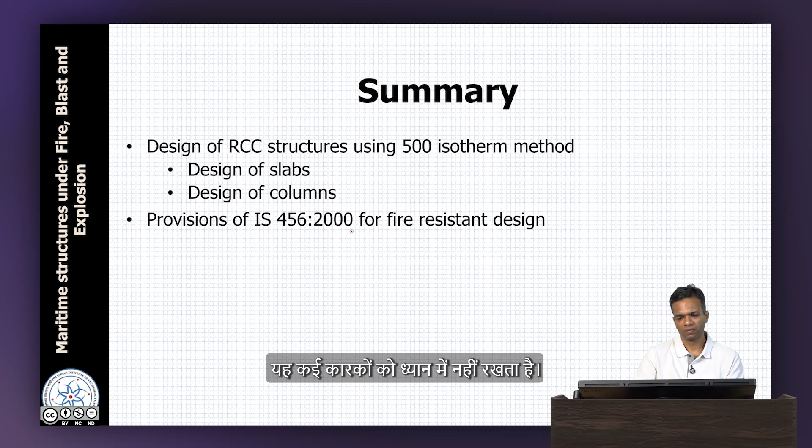What are these factors? The loading ratio is not taken into account. The reinforcement ratio, the percentage of steel, will have a role to play in fire resistance, but that is not taken into account. Grade of concrete, degradation of concrete strength—there are so many factors which, when we consider, we are able to get a more accurate estimate of fire rating of RCC members, and one of those methods we have learnt.